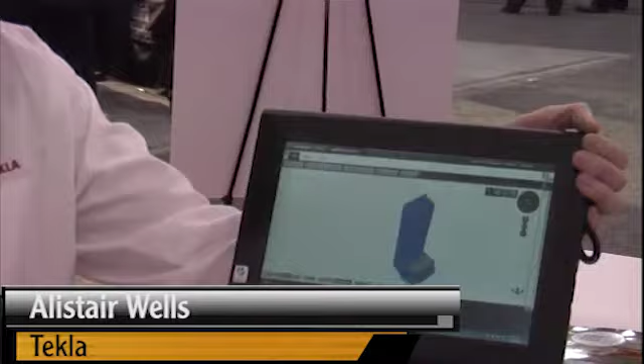Tekla BIMsight, which is what you're holding in your hand, tell us about this. This is, to me, confusing, but for people that use this constantly, they're going to get a whale of an exciting idea. So what we have here is one of our products, Tekla BIMsight. This allows people to take those models that are out there. You've heard about the BIM technology, building information modeling. It's real big in the industry right now. What we've tried to do with this product is give everybody access to those models.

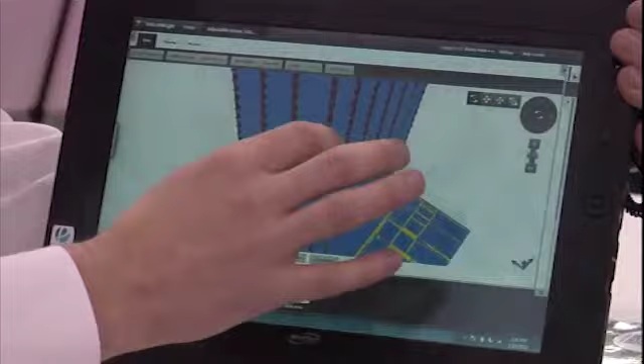So somebody can bring in a model, and this is a model provided to us by a company out of Chicago, Adjustable Forms. Eric there has modeled this structure himself, and I can zoom in, and you can see it's a basic concrete structure. Is it a multi-story structure? It is, a multi-story office building, I think, for downtown Chicago.

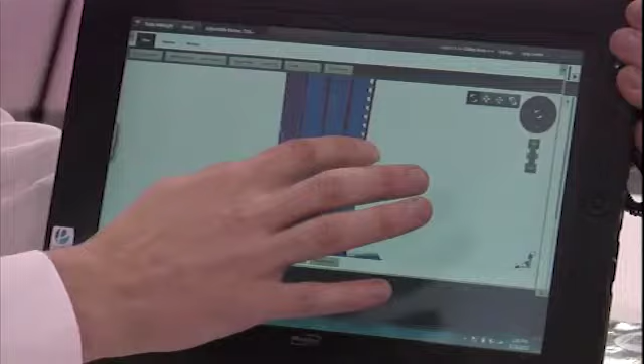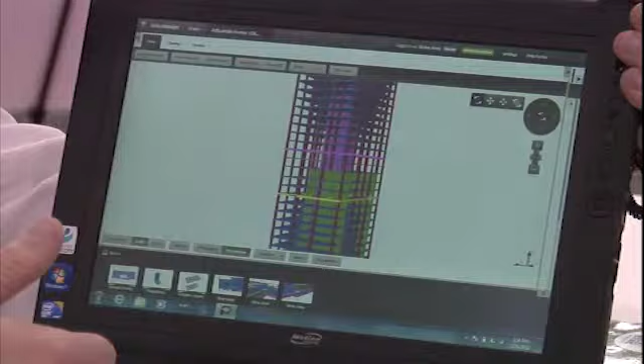What he's done is create this model, not even for a construction phase. He's created this to help him with the bid, because once you model something, you can run a quantity of it and pull a quantity. So he's got a very accurate estimate for his job. And he's brought it into this tool, Tekla BIMsight, and it's allowing him to share it, to show people what he's going to be doing.

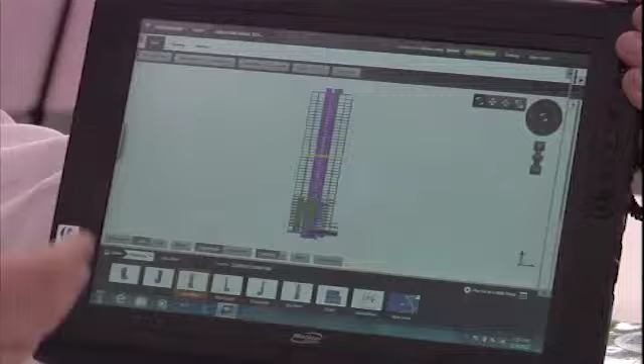So he can set up some views and just step through the construction. He might be doing this in the bid phase, in a presentation, showing the elevations, showing some of the plans, getting into how he's going to build it. Computer modeling replaces all pens and pencils, and it makes it simpler, and he's gotten a lot of quantities from it. So at that early phase in construction, he's just using this to win the job. It's a real tool to help him win the job.

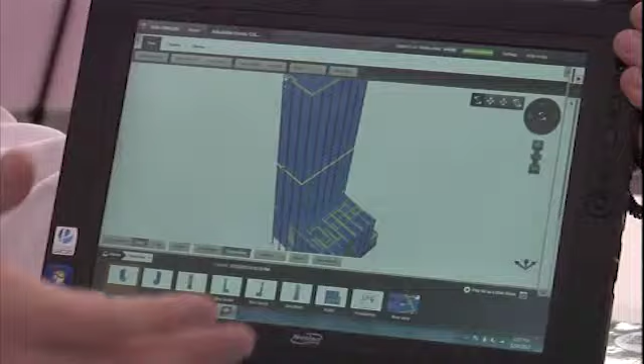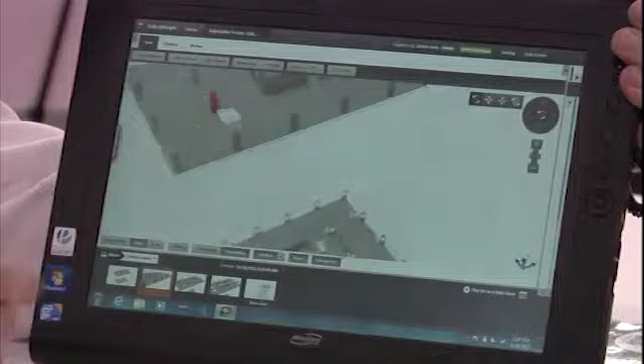Now I'm displaying this on a Motion tablet, but it works equally well on a laptop or a PC. He can come in here and really start discussing issues. So even before he's won the job, Eric found that on the 28th floor there are some columns with issues. This is the same model, just colored differently. And he can step through a discussion with the general contractor about what's going on with these columns that are a quarter of an inch offset from all the other ones.

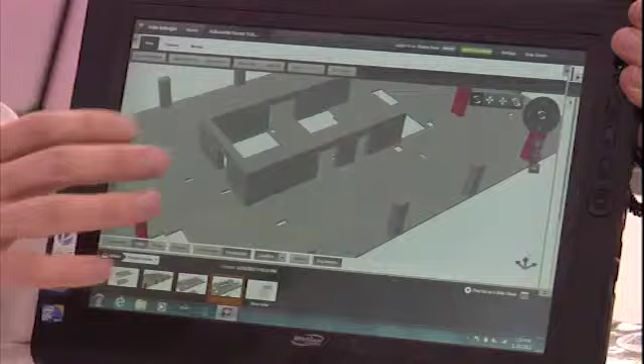This is the contractor that has set this up for this particular project. He's gone in and modeled all of this information from the drawings, from the plans. He hasn't even won the job yet, but he's getting this information, discussing these issues with the general contractor before he wins the job. And he wins the job because he's got a very good vision about what the job's going to be.

And can the contractor then adopt this and say, okay, it's going to cost me this much to move these columns or whatever? He can put in the information right there and then about the costings behind it, that's what it's all about. And particularly in this day and age, in this economy, he's saving himself money and winning a bid by having this technology.

BIM is really big about general contractors sharing the information and sharing the data. But he's really doing this for himself, for his own productivity, pushing it forward for himself. The great thing about it is once he's won the job, he can take it a step further.

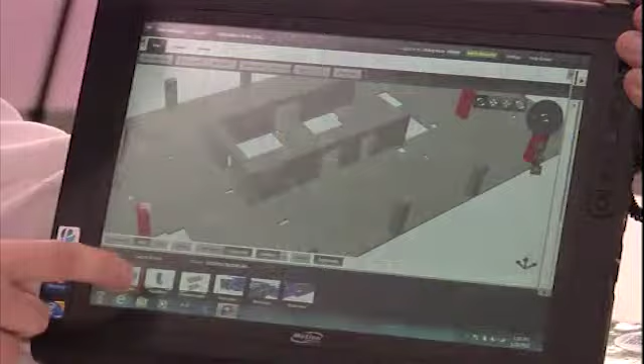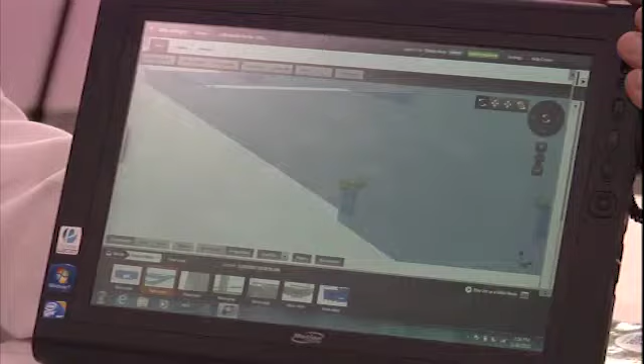So in this case, I can take us to some other views. Right here there's a slab, you see these green spots? Those are layout points. They've gone into the model and selected these points that we can now take out into the field and link with, say, a Trimble unit. The guy laying out the slab can be guided to the exact location of where that slab edge needs to be. It's a very powerful tool, and he's got a number of points in here.

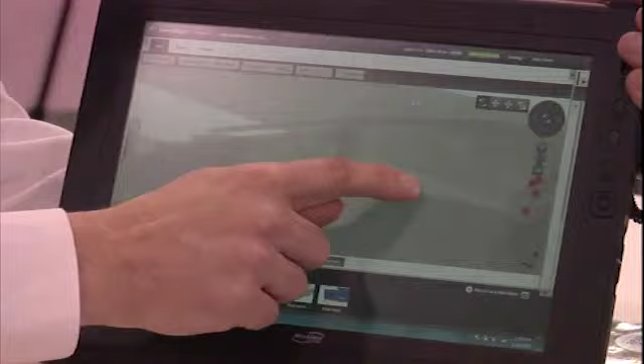You can see them, it's really in this elevated slab here. How are they going to lay that out? Well, it's all in the model, linking it directly to the field. So he's won the job. Now look how more productive he's being, because he's not pulling a tape, he's doing it directly from the model. And it leaves very little to the imagination. There you go, it's all real time.

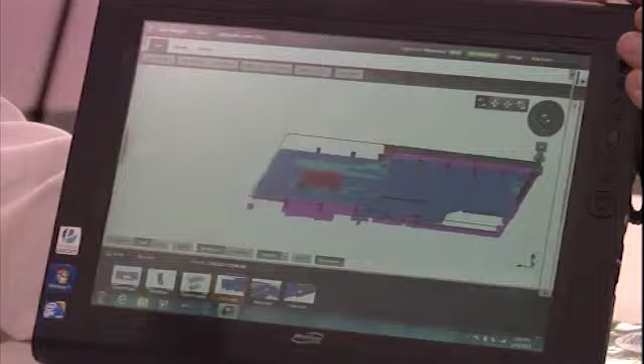And talking about little to the imagination, let's say I'm the site superintendent pouring the concrete. How much concrete do I need to order for tomorrow? So what I can do is come in here, I've got a cut plane here, let me try and select that. So there's the model, and I'm just cutting down through it.

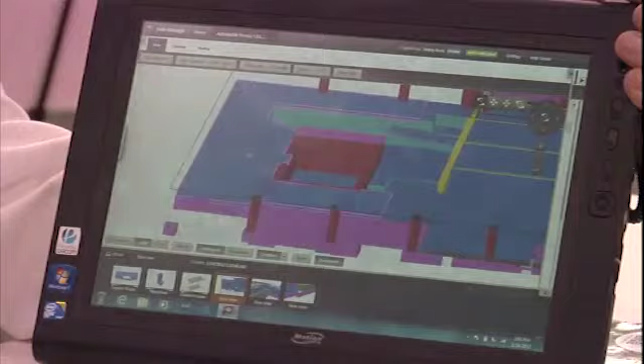I can come in here, zoom in, let's select that slab, you just see it outlined. How much concrete is there? That's inherent to the model. It knows from the shape, from the depth, how much concrete volume there is.

I can pull my data tab back here. So I've got the slab on grade, it's highlighting it for me there. It's 141 cubic yards of concrete.

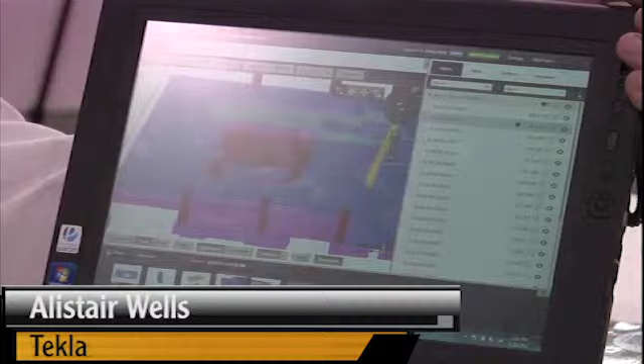And you know, I've seen site superintendents running across concrete as it's being poured, a calculator in one hand, a drawing in another, trying to determine how much more concrete he needs. All he needs to do is click on the slab in his truck or on the site, and there's the quantity of concrete volume that he needs to order.

What I find interesting is that this product can be integrated with Trimble. Yes, and of course there's so much now that's being put on pieces of equipment that are out in the field, basic lot clearing and site preparation work, and it's all information technology, preset at a computer, and it goes right into the machine.

Let's take it a step further. Let's say I'm a site superintendent, and I've put some anchor bolts in the ground. I can take that same Trimble handheld, locate those points for the anchor bolts, send it back into the model, and then it'll tell me how wrong I am, what the delta is, and whether I need to correct the anchor bolt locations. Really? So it's a real powerful little tool.

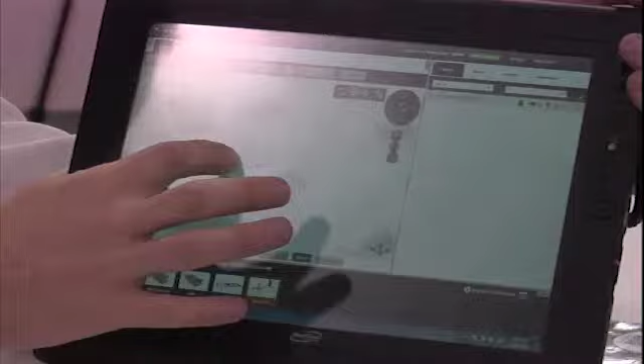I've changed models here. What I wanted to do is show you some rebar, so that the rebar guys don't feel left out. This is a different model, but in this day and age, everything is being modeled. So here, let's get rid of that. Here we can see the rebar cages that are part of this concrete structure. So there's the piles and the slabs with the concrete volumes within them, and we've got rebar in there as well.

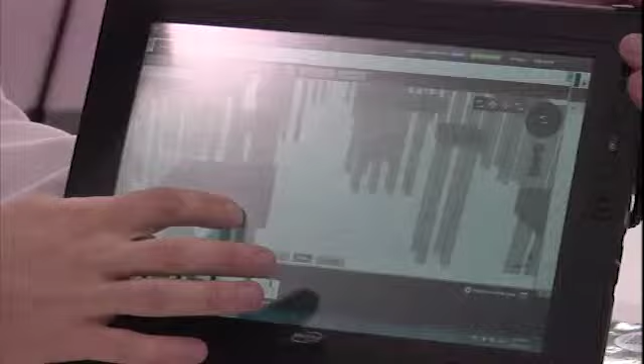So we have clients using this technology. They're detailing the rebar in 3D, creating the usual shop tickets, the usual information to the fabrication plant, but also creating a 3D model. Those bars can be identified as top bars, bottom bars, you've got your placing routine, so the guys in the field placing the rebar can now see it in 3D.

Now, more often than not, it's not going to be for a simple wall or a simple slab. Exactly, but for a congested area, yes, you can rotate it in 3D in the field.

Very powerful technology. What aspect of this do you think most contractors would seek to look at? I think where they start is the sales and estimating side. They see it as a very powerful tool to share what they've done for a sales bid with the general contractor, the engineer, even before they've won the job. That's very powerful for them.

But then managing the job, on-site managing the job in 3D, how much concrete do I need? When is that piece of steel going to arrive on site? You can call all that information up with this 3D environment.

And what's really unique about this tool is I'm showing it on a tablet, touch tablet. Yes, it's probably one of the first times - take an iPad, a tablet, whatever - it's one of the first times technology like this, useful technology, has been seen on a tablet.

This is the version that we're launching at World of Concrete that allows you to use it on a tablet. I would say probably the last thing they find beneficial about this product is it's free. You can download Tekla BIMsight from teklabimsight.com totally for free. So they can take their models, whether they create them or a general contractor creates them, and they can do all of this type of thing.